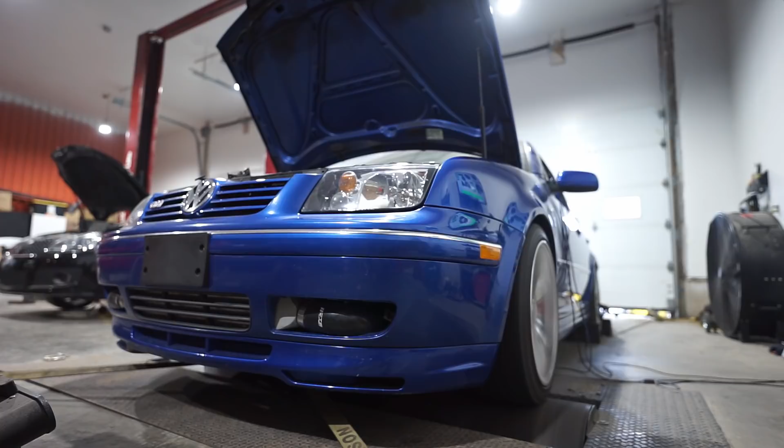So this will be part 3 of this. For those following along, we've gone through a bunch of changes with this car, and the whole entire build I'll link above. This is probably the 5th or 6th video now, so if you're interested in 1.8T big turbo content, there's a lot of info in this whole series.

So now we've got water meth on it, we did a turbo swap to a GTX3071 Gen 2, and we're going to see what we can get for power on 91 octane with the water meth setup. It's running Eurodyne Maestro 7. All the rest of the details of the engine build will be in the description below, and definitely in the previous videos.

Okay, so Clayton, I'm just going to start logging, and the boost controller is turned off right now. We'll see what it makes for the first run. Just a base run, no water meth, just to see where the map is fueling-wise and stuff like that.

Okay, so I've already had the car out on the road to check fuel trims before we got it on the dyno. I've got probably a half hour or so of driving on it. Everything was pretty decent, so I suspect this to be pretty close right off the get-go for the boost we're going to be running, because it's going to be pretty low—probably only maybe 8 or 9 pounds of boost, I suspect.

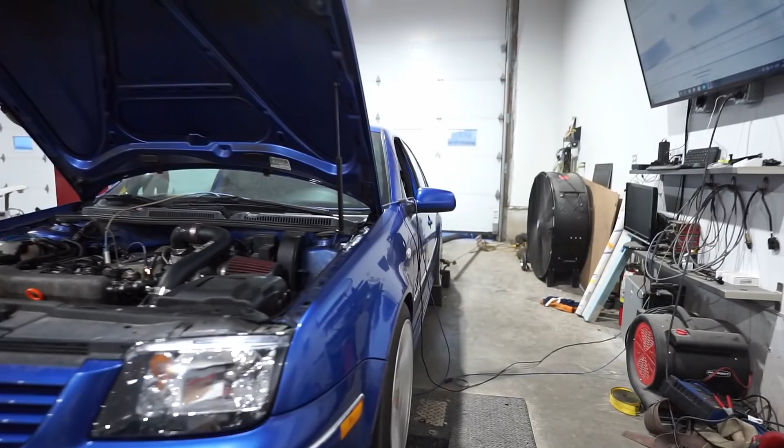It's so deceiving because this thing revs forever. Yeah, I know, and I still let out early. So it sounds like big power. Yeah, no, it sounds good. It sounds really good, it does sound good.

It's just, for those wondering, it's just a resonator—that's it on the whole thing. 3-inch with a resonator. So, because I get this question quite often...

Doing a straight pipe on your car, if it's not turbocharged, is absolutely moronic. So don't think because a turbo car sounds good with basically no exhaust that an NA car is going to sound good. It does not sound good—it sounds terrible, unless you're at a drag strip or something. If you do an NA car straight pipe, you're probably going to get pulled over pretty quick. A turbo is essentially a muffler, so it keeps it quiet.

And really, depending on the car, a smaller turbo car doesn't sound good with a straight pipe, usually a bigger turbo car does. But it's not going to be loud though. That's the thing, yeah, that's the difference. Still though, I've heard some pretty terrible ones. Well, yeah.

So I'm going to just look through this, see what it was doing. No water meth spraying at this time, so we're just going to assess and start chucking boost at it. That was only 240 horsepower, so pretty weak sauce at this point.

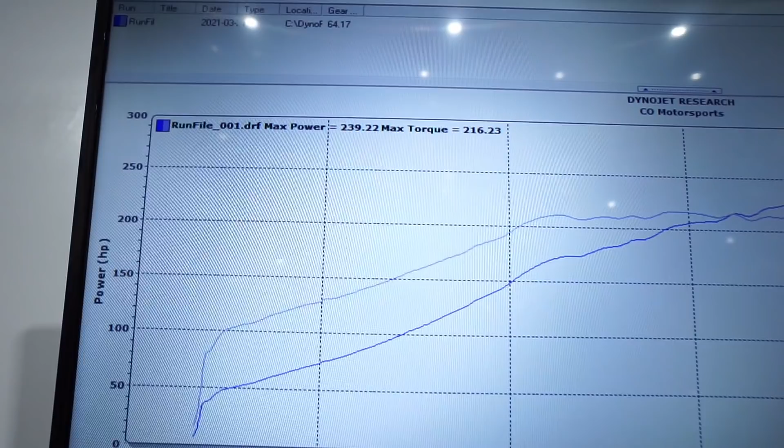Okay, so I've turned the boost controller on. I don't know what we'll see for boost at this level, so I'm just going to keep an eye on timing. Boost isn't going to be crazy high, but that's my major concern.

And we also hooked up—I forgot to hook up the map sensor to it so I can measure boost on here. But it's hooked up now, and we're ready.

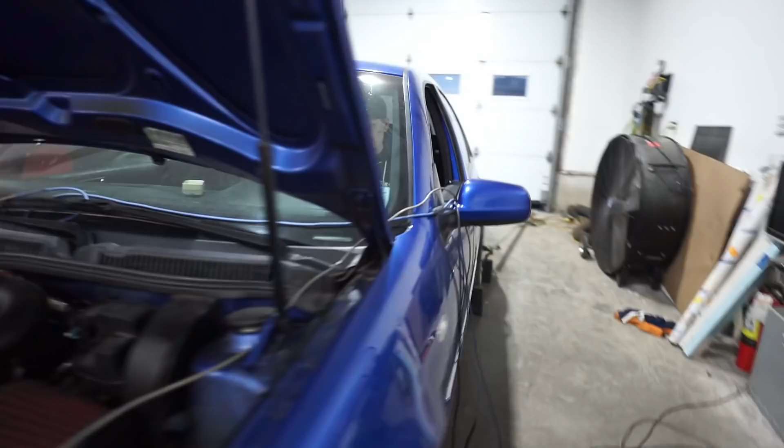That gave us no boost. We didn't get any boost. It's not going to help us out very much. Yeah, we need more duty cycle. I don't know, clearly.

Power, if we don't get any more boost. So let me reassess here. All right, so did you figure it out? I figured it out. All right, yeah, that's good. Just some settings, right? Yeah, I had the wrong settings. Like the on and off setting? Yeah, I said I had turned it on, but clearly I didn't. So we're going to redo that again, and add some boost to it now.

The light is dim when it's on and working, and goes brighter when it's flashing. It lets you know, hey, I'm here, I'm working harder. When it's flashing and working hard, and then when it's spraying, and when it's out, I think it flashes. When it's out of meth, yeah.

And we got some errors with the Maestro, so we're going to try to relog this. All right, hold on. Well, traction control gets me every time.

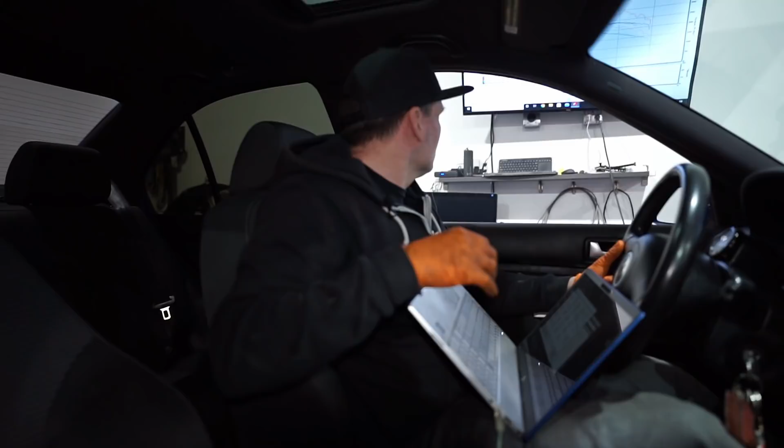Definitely some more boost. So we're into the 300s now, just barely though, 304. I have to look and see what the fueling was like. I was watching it, but I gotta look at the log.

Looks like you could probably come back on spring pressure a little bit too. Yeah, maybe. But it's all over the place, so that's looking like fueling and some timing. I can probably throw some more timing on it, but that's the point of this. So I gotta look at the logs now, and then we'll probably have to make a map for it.

All right, just a little more power, same boost. Let's hope.

Power, same boost, but not as much as I was hoping.

Work to do on the back end though. Yeah, did she say that also? I hope not.

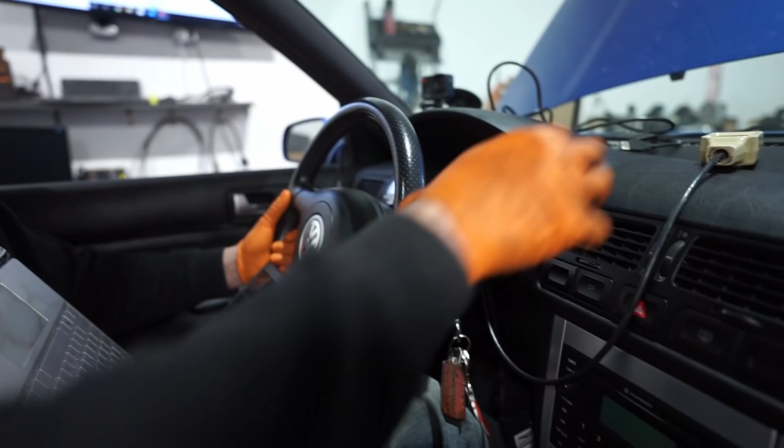Hitting the cut. Okay, what are we doing? What happened? Why did we stop? We stopped, well, it was getting late for one reason.

We started hitting the cut finally when I started first turning the boost up. What kind of cut, boost cut? Fuel cut. But it was just a small little spot on the map, and I had the gauge set pretty aggressively or pretty sensitive, I guess.

Yeah, we didn't talk about this actually. What, like me and you? I had no idea, like I'm learning right now. Yeah, that's all what it was in the end.

There was a small part in the map where this turbo comes on a lot quicker now, that made it a little bit leaner. Not anything as a problem, but because I had the gauge set so sensitive, it would be like random when you get into higher boost that it would happen.

Cool, so you did one run already just to see with the same settings. Just to make sure, exactly, so it's time to turn the cuts up. Fixed.

All right, so Clayton, pretty good start actually. Yeah, so looks like it's little fixed, more boost that time. It made 383, 335 torque. And the most important thing, it didn't hit any cut, like you said. No cuts, got rid of the cut.

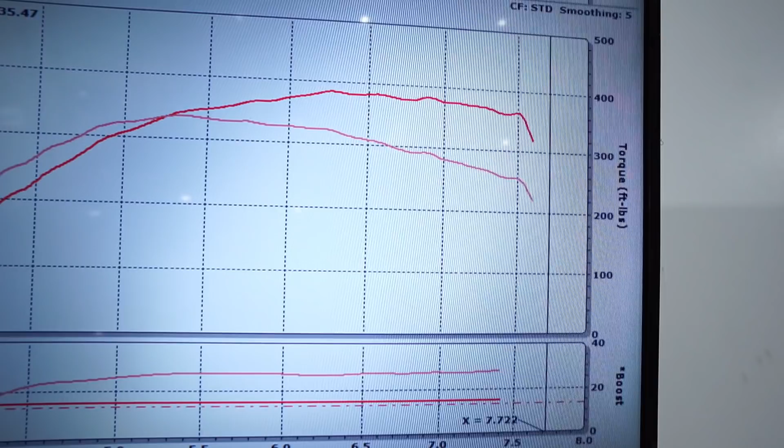So now we're gonna play around with this map a little bit, try to stick around this boost. The graph is pretty clean, actually, you can show them. And we're gonna see if we can make a little bit more power right around this level. All right, cool, okay? Yep.

Yeah, it's hard to hear with the old earmuffs on. Yeah, I heard it hit that cut. I couldn't tell, wasn't watching it.

I said it was fixed. Yeah, clearly I left something in there. 409. 409, but I gotta look at that, see where that piece is, and make an adjustment.

We're ready for what? We're ready to try again. I want to turn the boost up, but we gotta have it hammered out. It's not hammered out yet. Get hammered, I'm gonna hammer away.

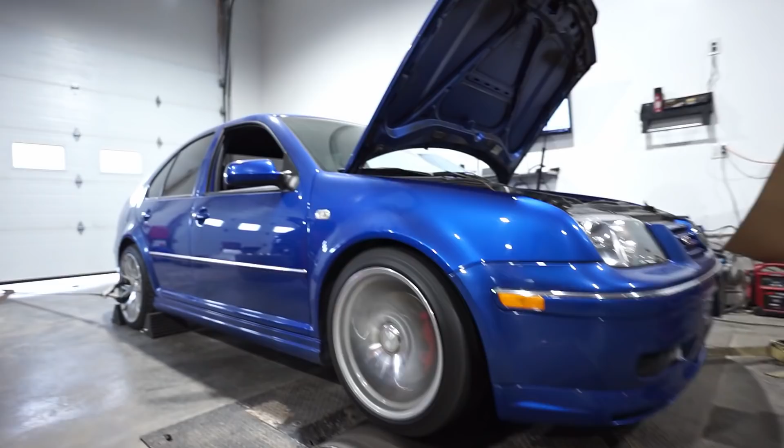I think we lost air on the brake, so don't step over there.

412. So I'm gonna look at the map and see if we can't squeeze a little bit more juice out of this thing. Just gotta look at the boost and take a look over the map, and we'll see where we end up. Figure out why we lost air on the dyno.

So we had 2 runs back to back, like 411, 412. Things are looking good. Boost controller's turned up. This will be the highest boost we ran yet.

All right, okay, this is the highest boost we've got set in it yet, and we're gonna see if we can make a nice clean run.

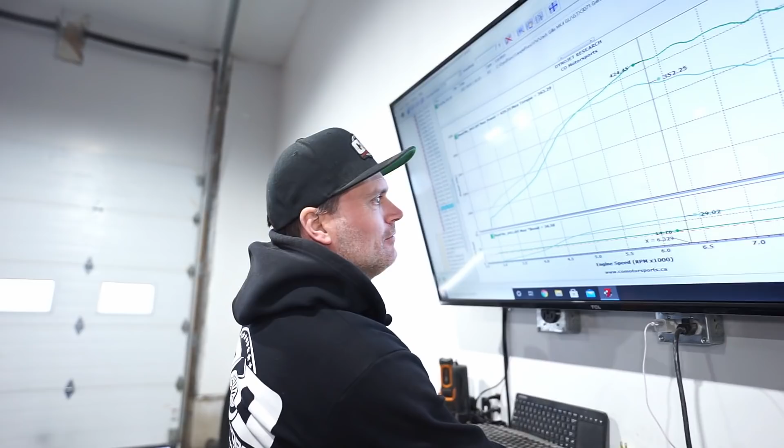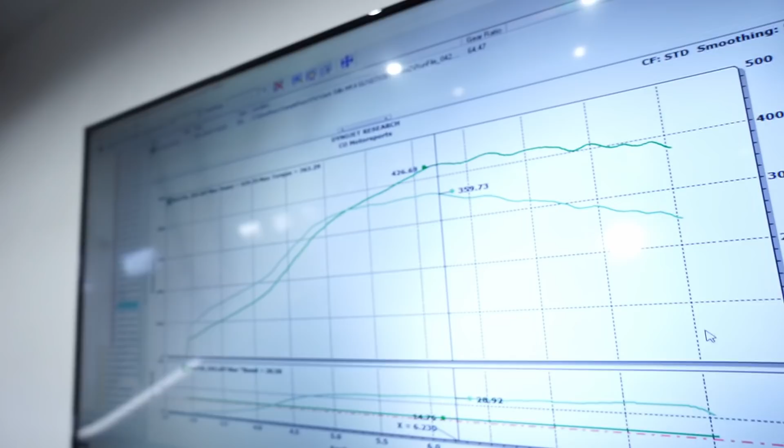Most of the run was like 28 pounds of boost, 29 it gets there. But so that's where we're stopping. I can go probably a little bit higher, but it's getting to the point that my goal was kind of really to see around 400.

Our fuel, as we've mentioned many times in the past, is really junky, 91 octane. Yeah, did you know? No. It's 91, yeah okay. It's really junky, so for us to lean on a single nozzle water meth setup to make this kind of power on our fuel is really good.

A couple things to note on this: if the car is knock limited and the ECU is already pulling timing, then you could put a water meth kit on it, look at some logs, and potentially gain a little bit more power.

The key to this, and the reason we're making really good power and I can turn the boost up this high, is because we're actually tuning for it. So chucking a water meth kit on your car and just hoping to make 60, 70 horsepower in a 4-cylinder doesn't happen like that. The setup is tuned specifically for the water meth.

We've achieved my goals. Could probably go a little bit further, I think, but we do have a lot of time into hammering this one out, chasing the odd little problem. So I'm satisfied where we are. I know the customer is going to be super satisfied because when it left the last time, it was probably only at around 350 wheel horsepower on pump gas, and it was a lot lazier.

We're going to show you the difference between, I think we got two runs around the 400 horsepower range, and we're going to show you the difference at that level of how much power you gained down low. So give me a minute, Clayton. I don't have boost on that though, so we can't really compare boost, but it doesn't matter because it's turbo for turbo, power band, right? Yep. So the blue is the 62.

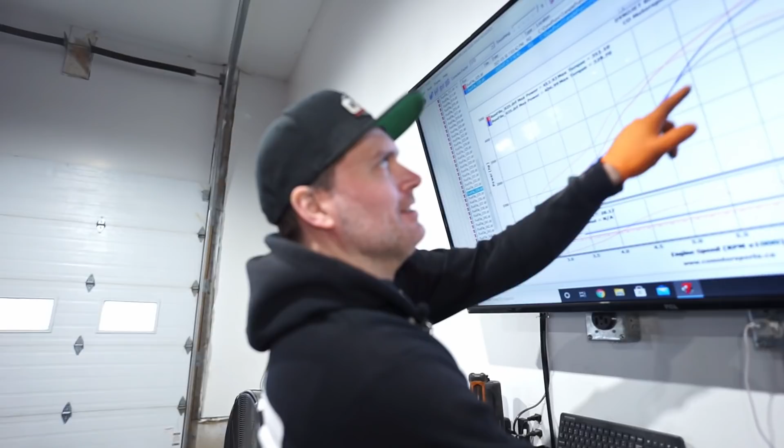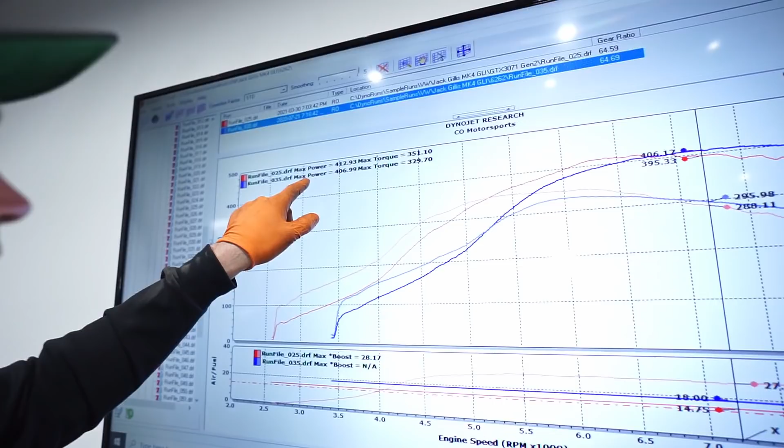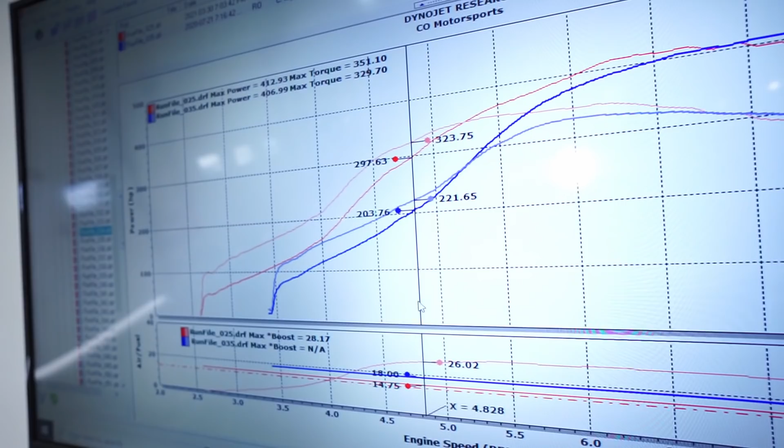It made - again, these aren't peak numbers, we're just trying to compare similar horsepower runs, right Clayton? All right, so the blue was 406, was a 6262. The red 412, so very similar overall peak power. But if you look, I can tell you one thing that's not similar - if you look at like 4,700 RPM, 4,800 RPM, we're talking 95 wheel horsepower in the difference and 100 foot-pounds of torque.

And I don't care how off your butt dyno is, you'd feel that. You're 100% going to feel that. So this is going to make this car completely different on the street. I have no doubt he's going to be pumped with these upgrades.

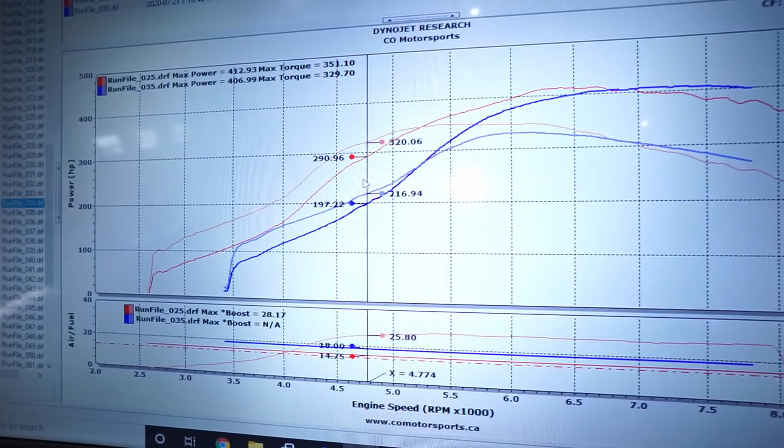Yeah, so let's take another look at that. It's a crazy, crazy difference in the power. In fact, yeah, we're creeping on 100 horsepower in the difference. In a power band that you spend a lot of time in. Spend a lot of time, yeah. So it lights up really quick.

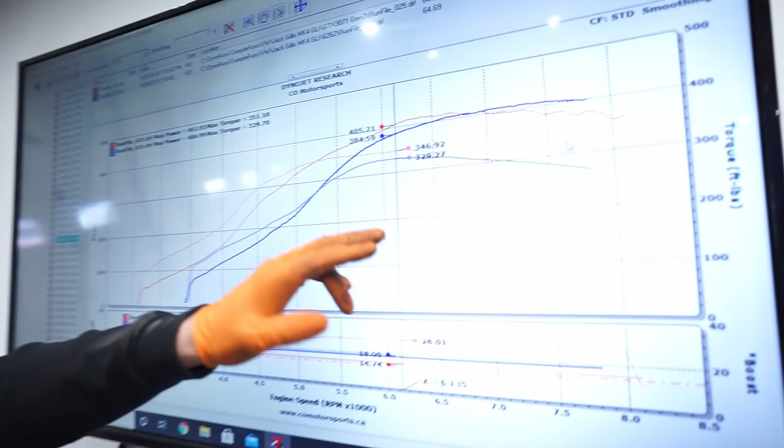And clearly makes the power. The one thing you'll notice a difference is that the exhaust wheel on the 62 is continuously making power, where now the 3071 up to like 8,000 RPM is starting to fall off. But the little bit of sacrifice up top ended up being very similar peak power in the end. It's going to be a ripper on the street for sure.

So Clayton, what are we forgetting? I don't know what I talked about in the video previous, because this one's not going to be fun. Editing? No, because things were going really good the other night. We started making some good power, and then we were running into troubles and troubleshooting, and just the way things go. I think I said at the end of the previous video for this car that we're probably going to have a few hours worth of work. Was I lying, Clayton? No, you forgot to put 'quite' in front of it. Quite a few hours? Okay.